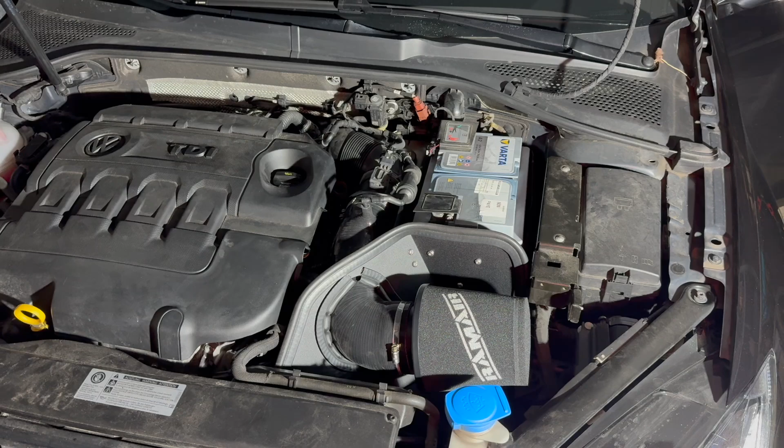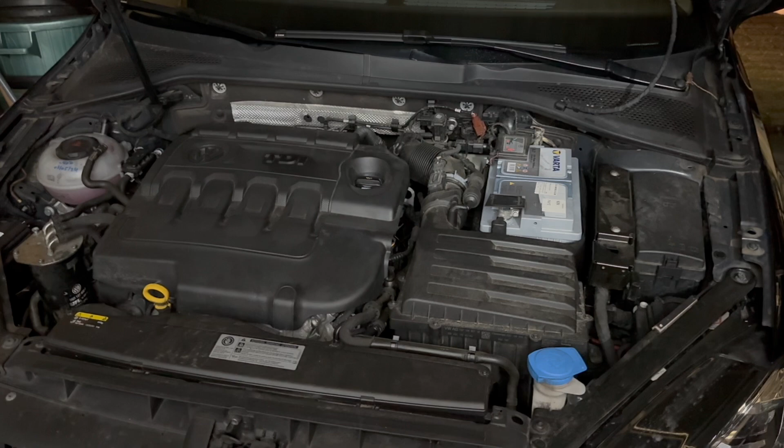Hi guys, today we're going to install the RamAir cold air intake into my Golf 7.5 1.6 liter TDI. So this is everything that came in the box as ordered online. All the tools are here, all the parts are here. You get yourself a neat little installation guide with this.

This is also what we're going to follow today, and what you will need for this installation, it's really pretty easy. It's just a screwdriver, an Allen key and a sharp knife. For the rest, you won't need anything else, just your hands, probably a friend to help you out, and we can go ahead with the installation.

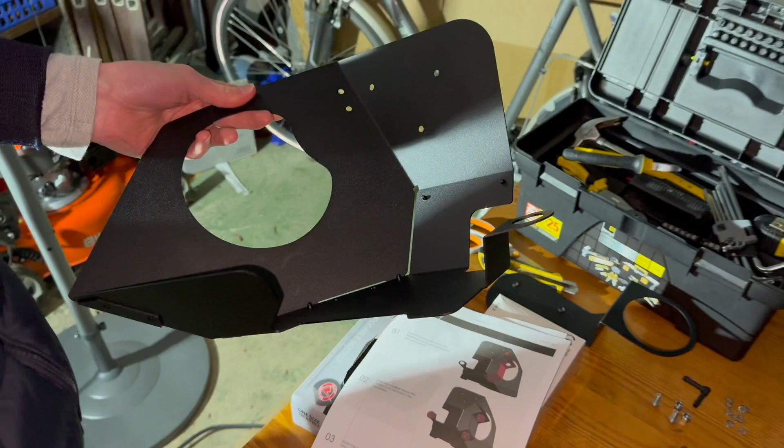So the first thing we're going to do is assemble the entire kit, and then we're going to install it within the engine bay. So the first step we have for the kit is to install the first bracket onto the heat shield. So you'll take your two pieces, you take your heat shield, and the first two bolts you will be looking for are underneath. You put the shield on it like this, and it will just be plug and play like Legos.

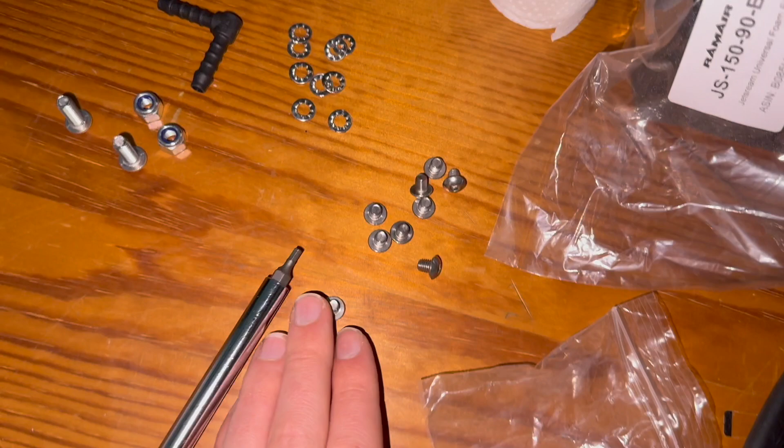The two holes up there will align the two holes underneath, and you need to bolt this with the small little screws supplied. So you have 9 small ones and 2 big ones. It's the small ones that you need to use. So we will need 4 bolts for this with 4 of these washers. We started with the first 2 bolts under here.

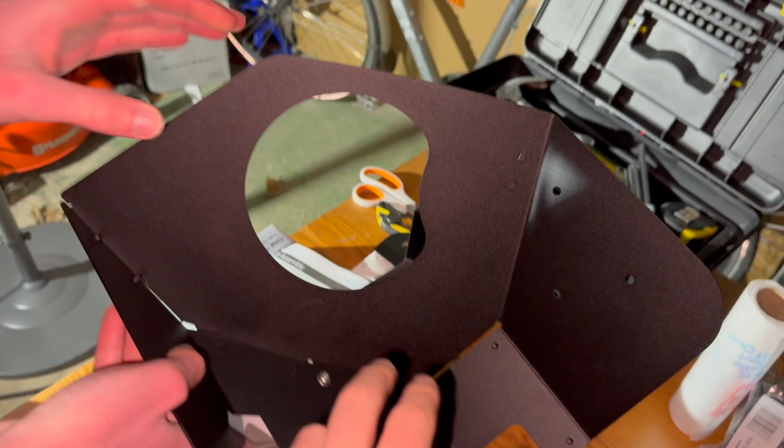So what you do is you take a washer, you then put your bolt inside of it, and it's bolted in from the inside. So the end of the bolt comes out here, and it's actually very flush and flat. So it makes kind of sense to do it like this. So we did the 2 first ones, and now we're going to do the 2 ones up here.

The second step in the kit assembly is to take these rubber feet. You have 3. I already installed 1, and you need to put them into the 3 assigned holes. 1, 2, 3. You can't miss them. There's 1 right here, and then 2 in the bracket you just installed.

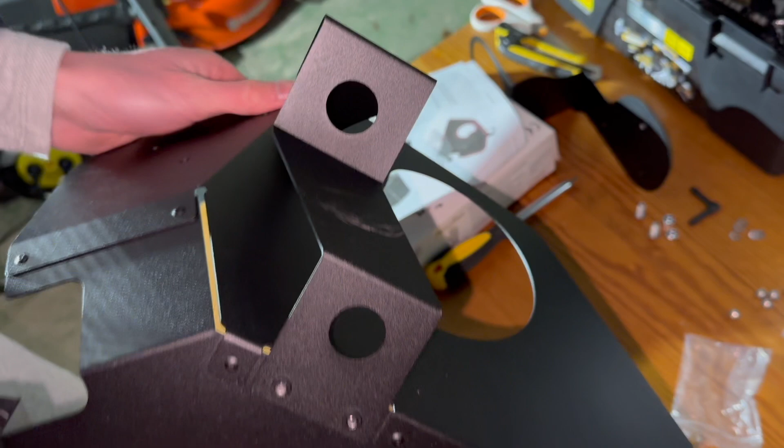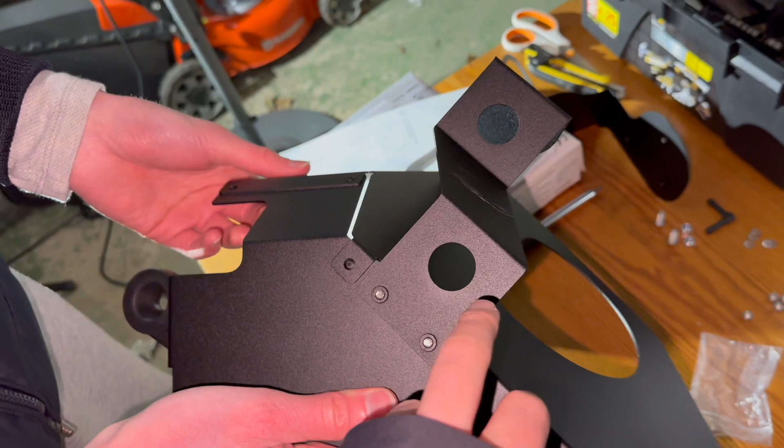I just did 1. Let me tell you, you need to apply a lot of force. It's kind of cold right now, so metal maybe is a bit more tight in these temperatures, but really you need to apply a lot of force, but be aware to not fold your metal by applying too much pressure. So just take these, put them in like this, and push hard to get them in.

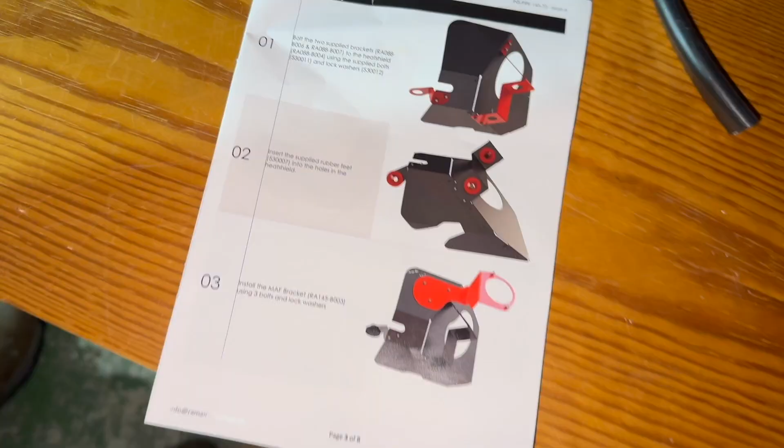The next step we have is installing the second bracket that was delivered also onto the heat shield. So you just take it, there's no way of doing this wrong. You align the holes down here, you put it like this, and again you use the same bolts as before. We use 3 of these with 3 washers, and we bolt from the inside.

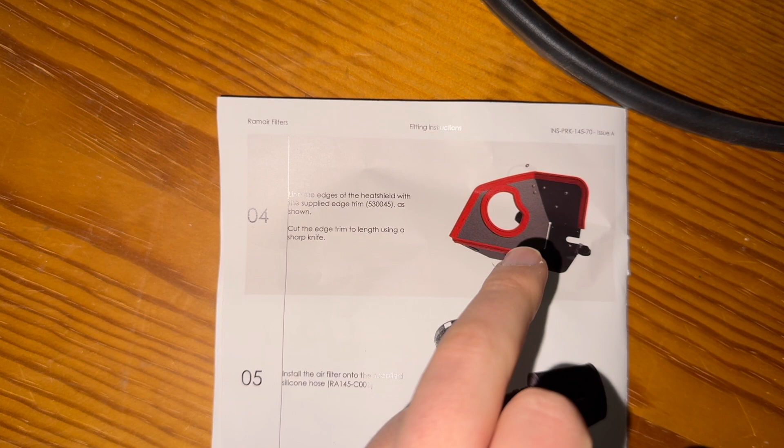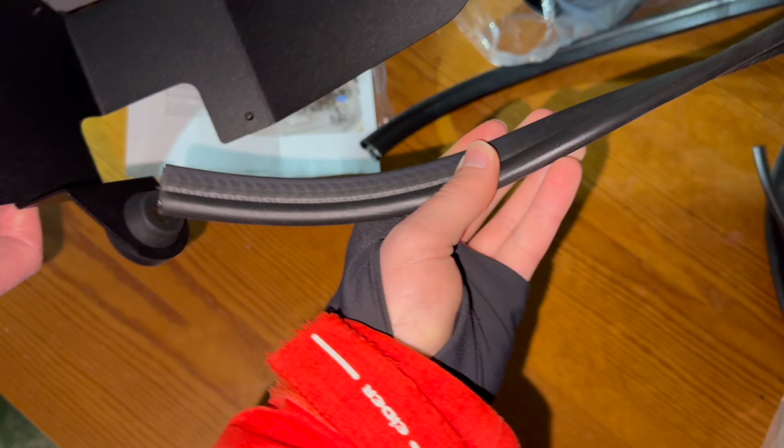Now that we bolted them from the inside, again with the washer and the bolts flush on the other side, we can go ahead with the next step, which is installing the edge trim that we have right here as shown here. So this is what we're going to do right now. So it's pretty straightforward, as it just has an edge where it needs to go into, and what's left over should be cut. So we have also prepared a small cutting knife to do this.

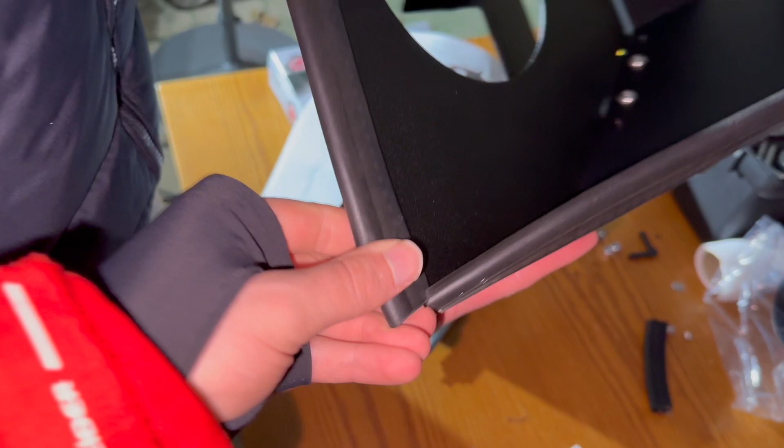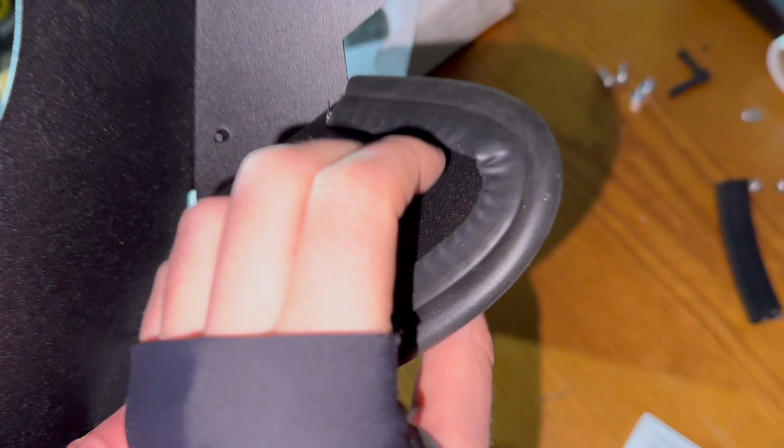So we have installed the first part, and we have some leftovers. So right now we'll just pull it out and, like right here, cut it just with scissors. We had cut off at this corner, and we installed the next piece going from here. And on the image we can see that it goes into this corner. So we did this. It's kind of crooked. You can see that it bulges on both sides.

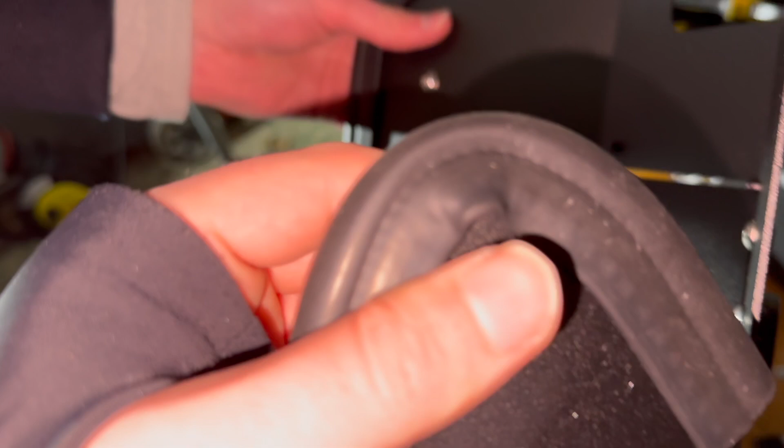But when you cut here and you push really down, it seems to stay in place. So we'll leave it like this right now. We can feel metal pieces inside that are now bent and don't move anymore. So we'll proceed now with installing the final part, which is within here.

Here you go, we installed the final part. We cut it maybe slightly too short at the end, but that will be fine. And the key is really to put your hand like this and really push it down like that, and it will create bulges by itself. And there you go, all the seals, edge trims are now installed.

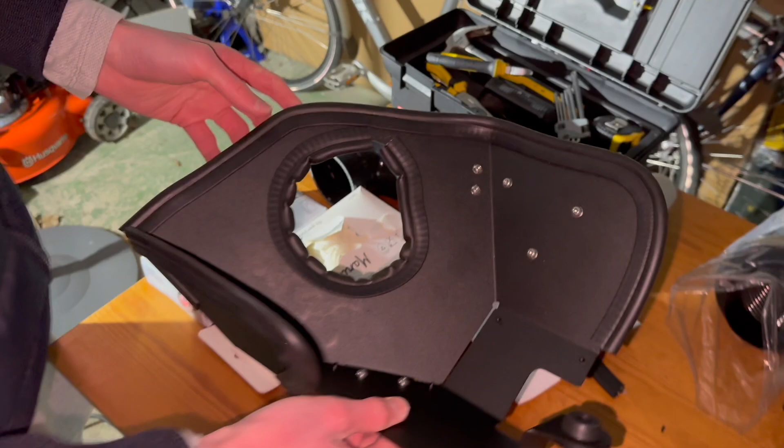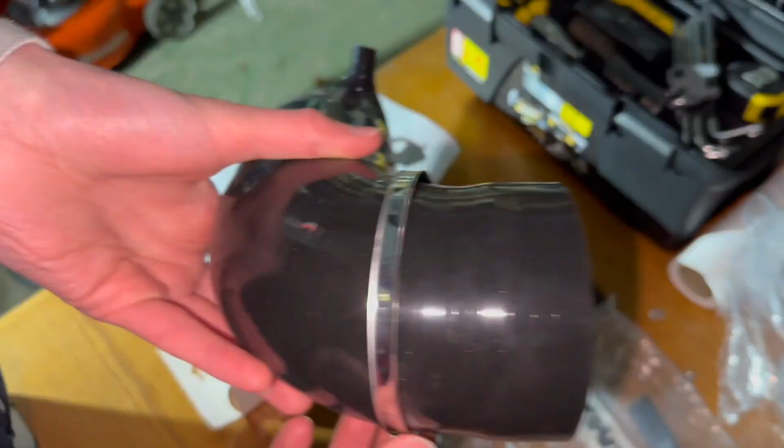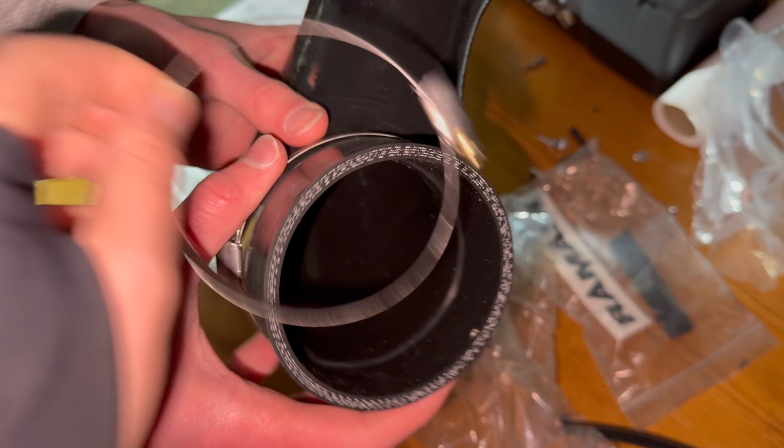We are now at the last step of the preparation of the kit, which is to take your cone and your hose and to put both together. But you will need for this extra, I don't know how it's called, ply or something to tighten it. There's only 1 of the 3 that are supplied that fit onto it, because if we try another one, it doesn't go onto it. And we checked, it's written on it that these are different sizes. Here you have 80-100. Here you have 70-100, so you can only take 1.

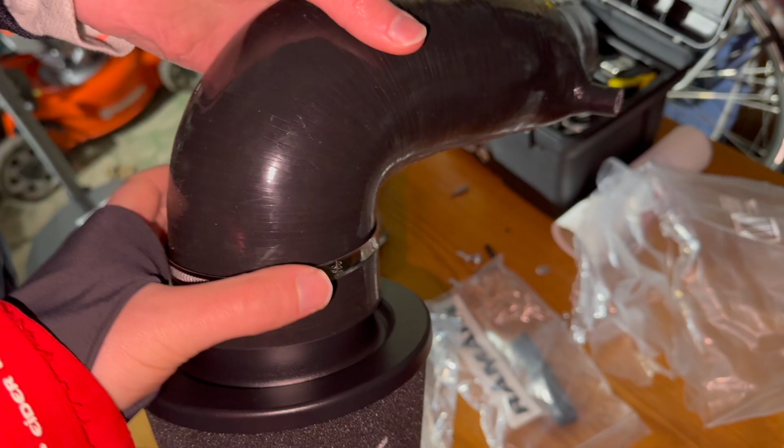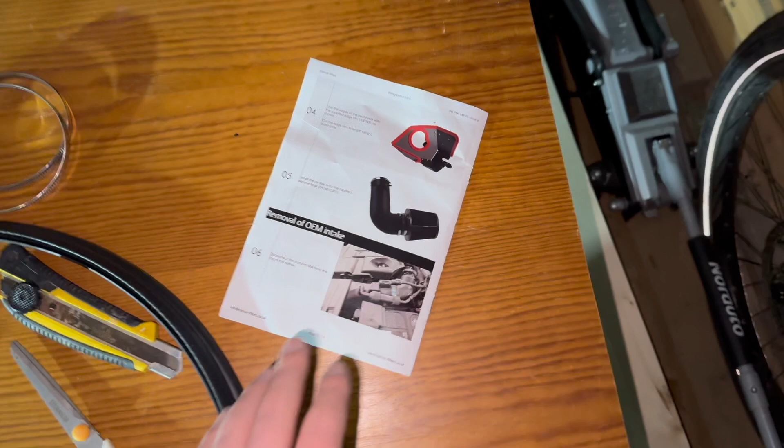So you take your cone, then you slide it inside. Normally it will stop by itself as there is a small edge inside. And then you take this and you tighten it. We have now installed the cone onto the hose. We have also really tightened the only bracket we were able to use. And for now, the kit is then officially assembled. So we'll go over to the removal of the OEM intake.

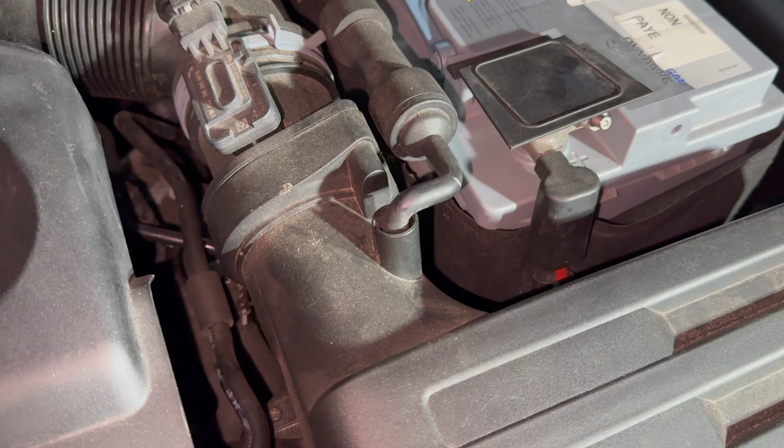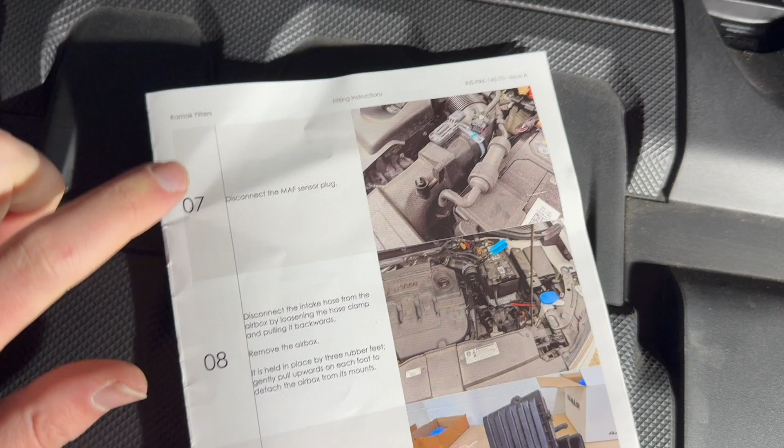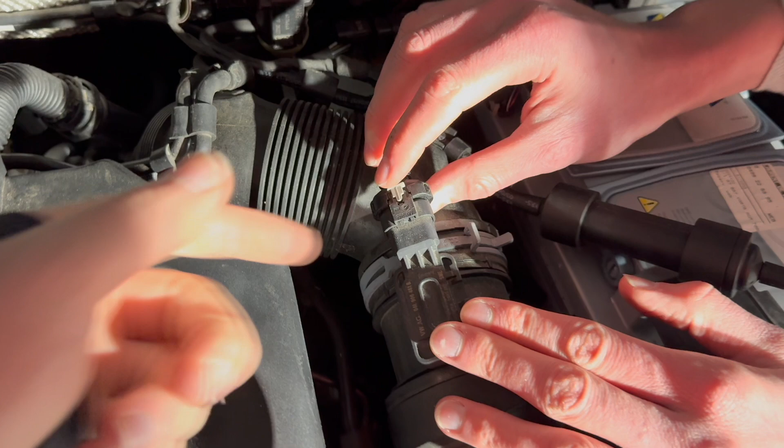The first step we have in the removal of the OEM intake is to remove the vacuum line from the top of the airbox. It's situated right here, and what you need to do is pull on it to remove it. The next step is to remove the MAF sensor plug, which is located right here. So first of all, you will need to pull back that little gray pin like this. And then you have a pin up on it. You need to press down on it to then securely remove the plug.

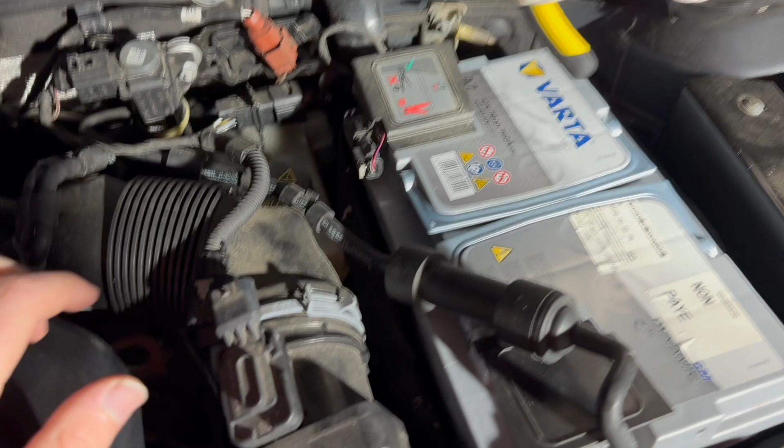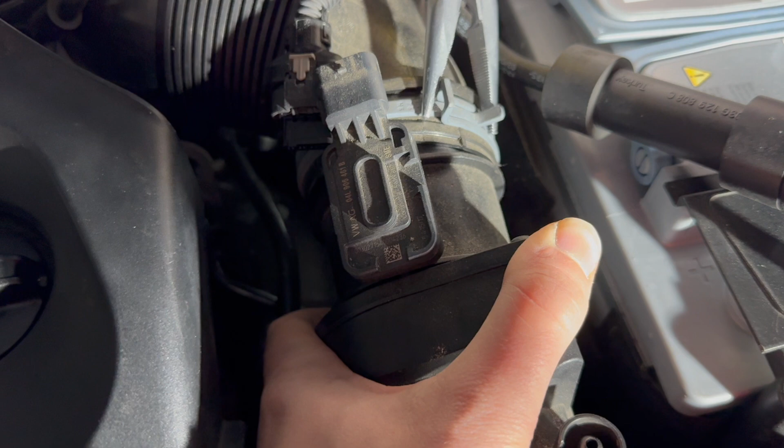The next step now is to remove the intake hose from the airbox. What you'll need for this are tweezers, and you have this clamp right here that you will need to clamp and really push on it to untighten it. This is really difficult to do alone. I would recommend to do it with two people, one unclamping and the other one pulling on the hose to remove one from the other. So we won't be able to record this right now, so we'll record again once we're done with this step. We've just finished with untightening this, and really you just push with your hand until it comes off, and then we're done with this step.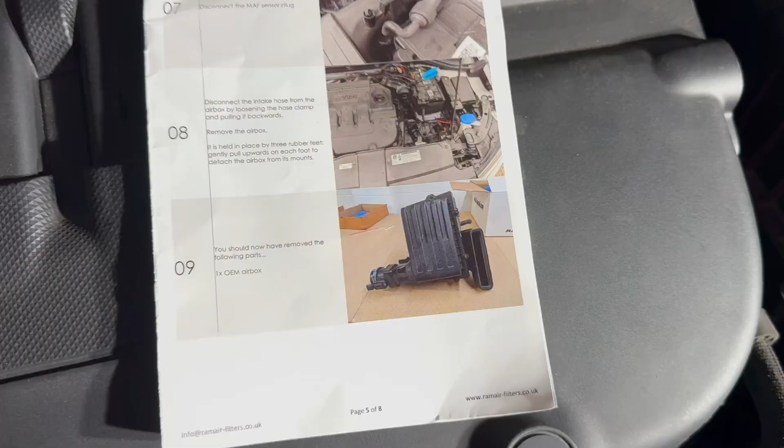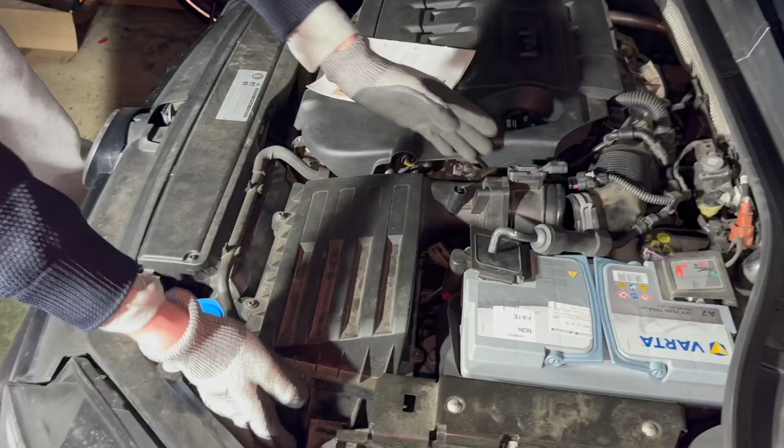And then the final step to remove the airbox right now is normally to really just take it out. It's held by some small rubber feet like the ones we installed before onto the new kit, so it should be pretty straightforward. I'm quickly jumping from the editing booth just to tell you while you're looking at it that it's a bit sketchy to pull on it, but these are just rubber feet. There's not a lot that can go wrong with it, so you really need to just yank on it from several sides until one of the rubber feet comes loose, and you will see in the next clip what I mean with this.

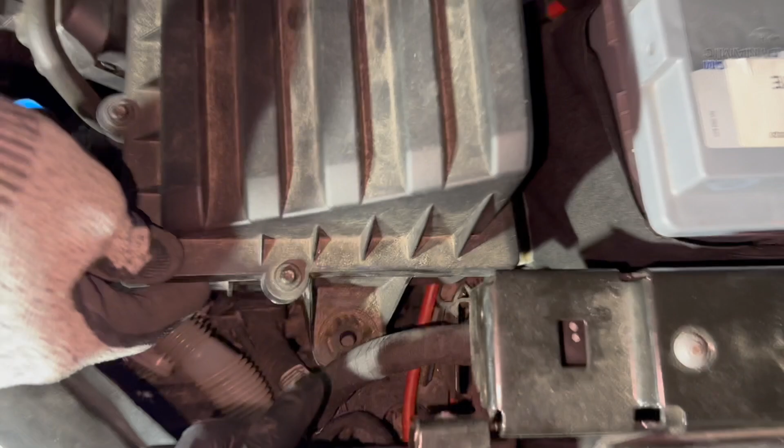To remove the airbox, you already were able to remove two, so you have three rubber feet. You have one right here, you have one down there, and one underneath that you can't see. So we just did two of them, and for the last one, yeah, you just need to pull, start it from the back, and it will remove.

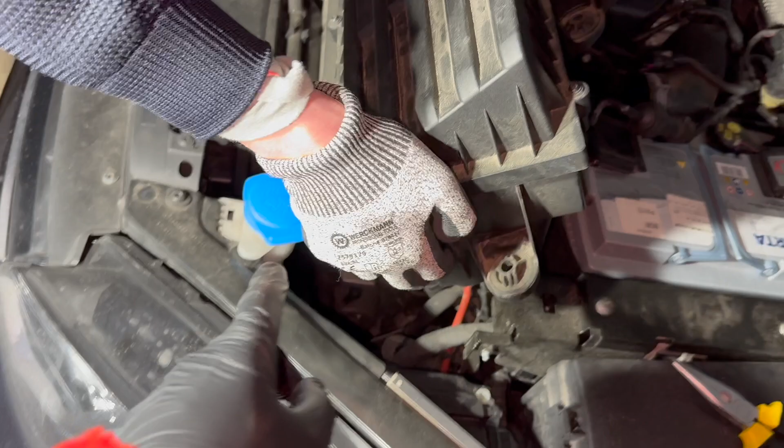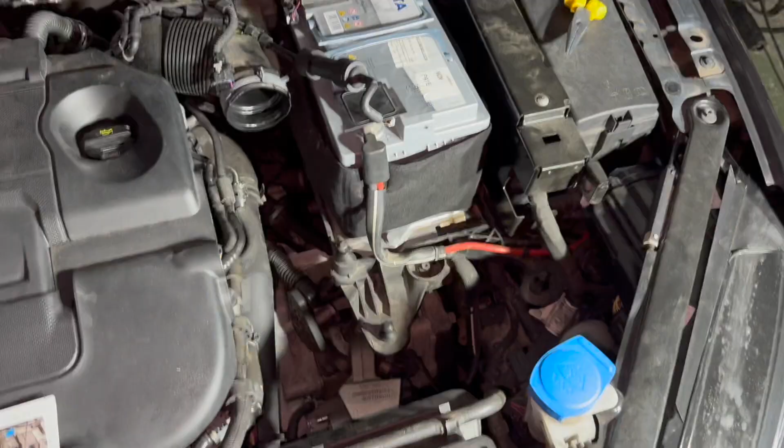And there you go. You need to watch out with the final part, as this is connected, as you can see, to the air intake, but it is all fine. And here you can see, here's a rubber foot, here's a rubber foot, and here's the rubber foot. We have now successfully removed the airbox from the engine bay.

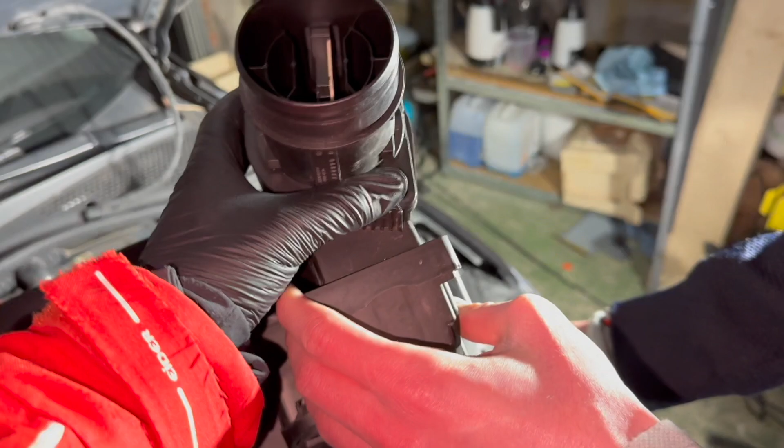The next step we have is to remove the MAF sensor housing from the airbox. So it is right now on here, and it is held in place by two bolts right here. So these are torx bolts that we need to remove to take off this part.

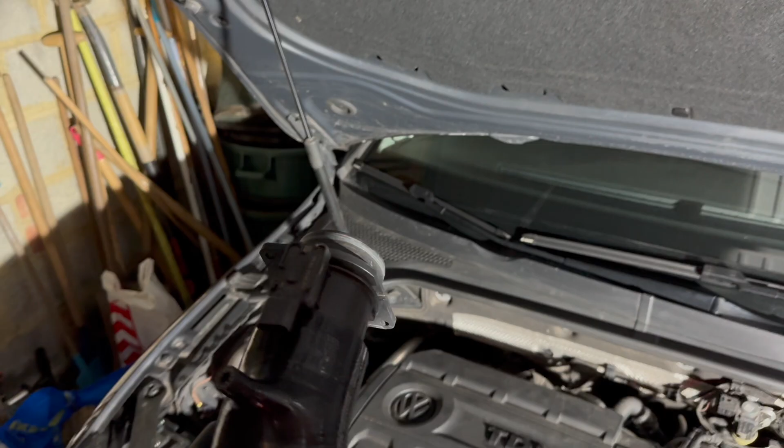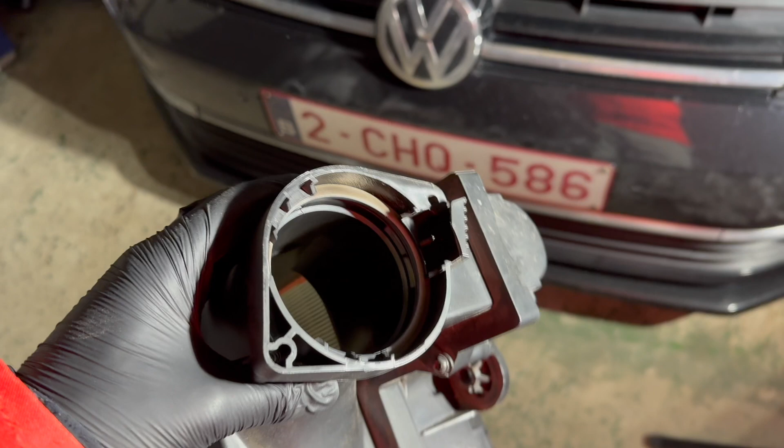So we were able to remove the MAF sensor. There was only one bolt, sorry for my mistake, and then it's held by this kind of ridge. So what you need to do is turn anti-clockwise to remove the MAF sensor, and it will come right off if you removed the first torx bolt.

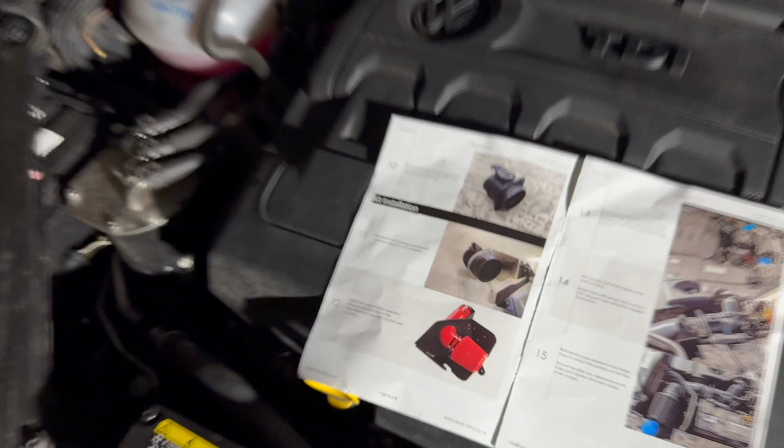We are now going to the kit installation, and the first step is to take the sensor we just removed and insert it into the bracket of our heat shield, and then bolt it. The issue we have is that it's physically impossible to bolt, as the holes do not align, and there are not even holes in our brackets.

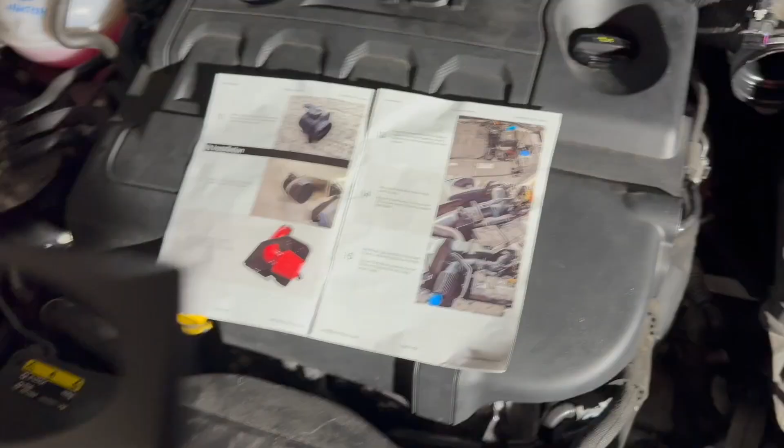There are none. So we're going to try this another way, and we think that we need to clamp it down later on. We'll just skip this step for now and go into inserting the hose and the filter through the large hole from the heat shield.

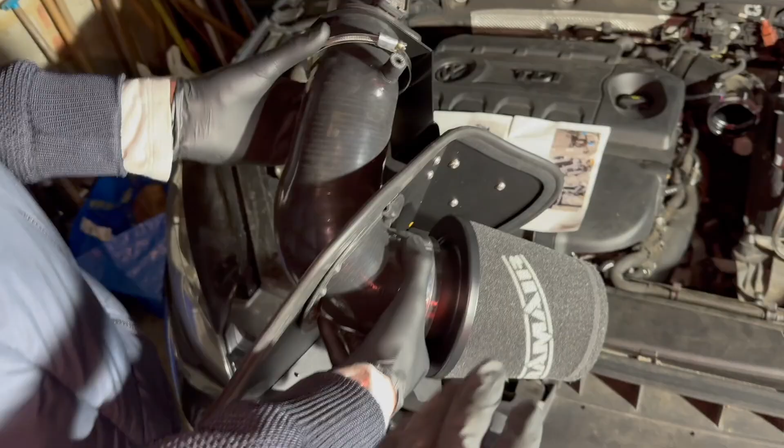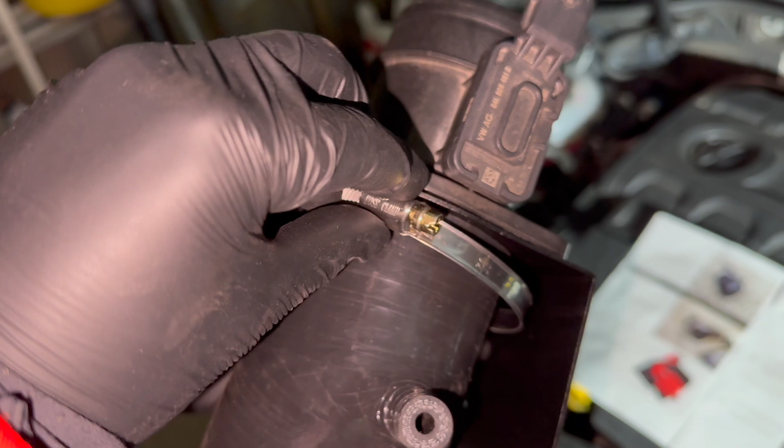We took our hose with the cone and put it inside the big hole. We have the MAF sensor that we slide through from the other side, and we put this tube over it. And now all we need to do is clamp it down, and this is why we think that we won't need the bolts as told before.

We decided in the end to do two clamps because we had one left over. This is not an obligation, as we see on the pictures, there's only one, but we don't know what to do with the one that remained, so we'll just put two for security. We have now successfully mounted the two clamps.

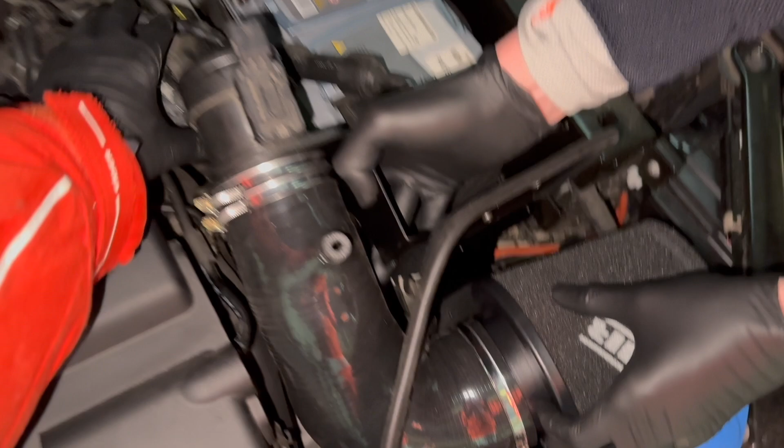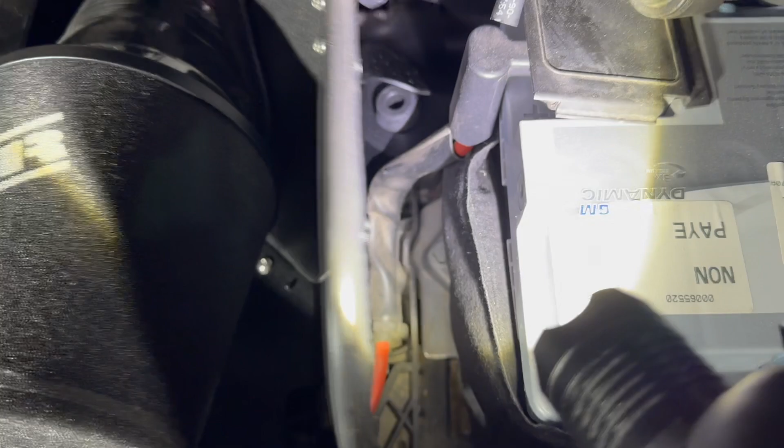The next step, step 13, is putting the airbox into the engine bay and pushing it down onto the rubber feet like we did with the old airbox. So this is what we're going to do now. We were now able to push gently onto the first one. There are two more rubber feet down here that we just need to push down. And it is now securely in place.

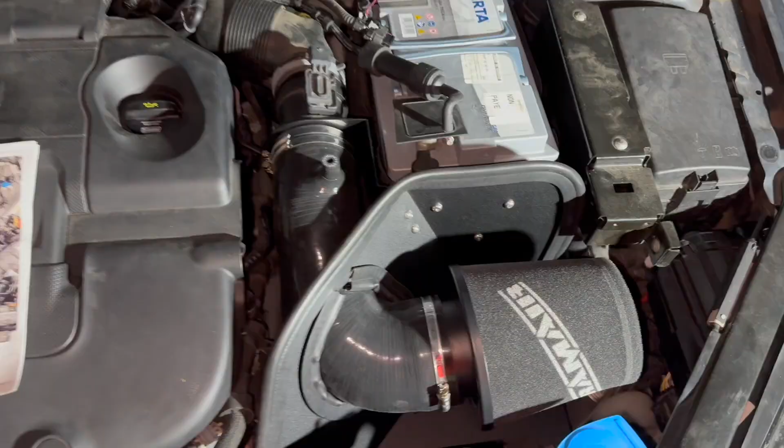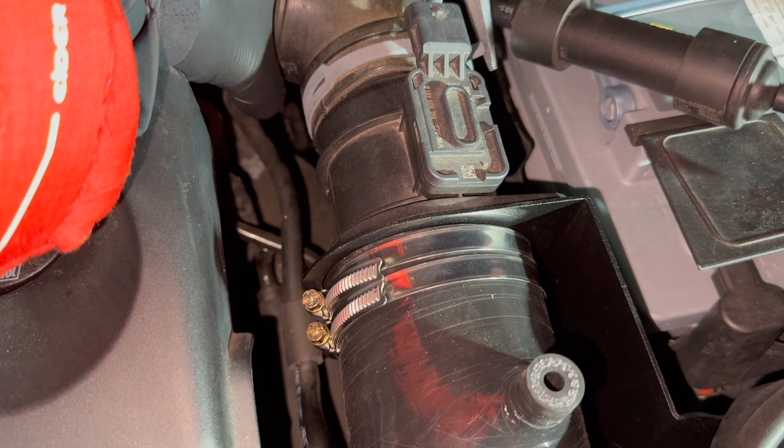So now that the new kit is on, you can already align the back hose with the MAF sensor, and what you need to do is again clamp it down, push it in, and then it's reconnected. We have now reconnected the MAF sensor with the rest. So the next step is to replug your sensor like this and put back the little pin.

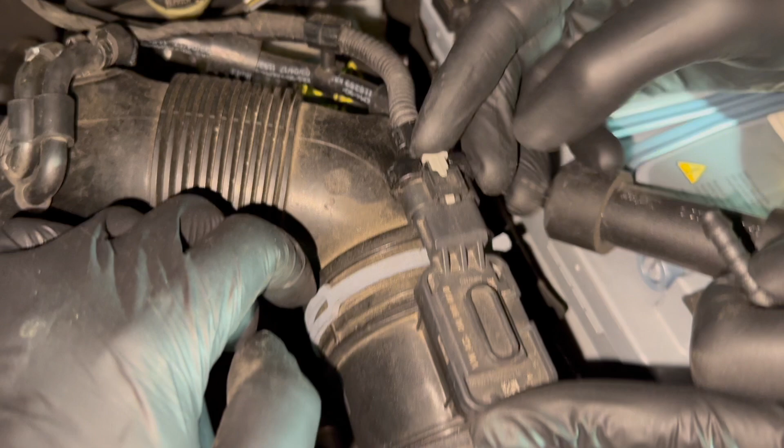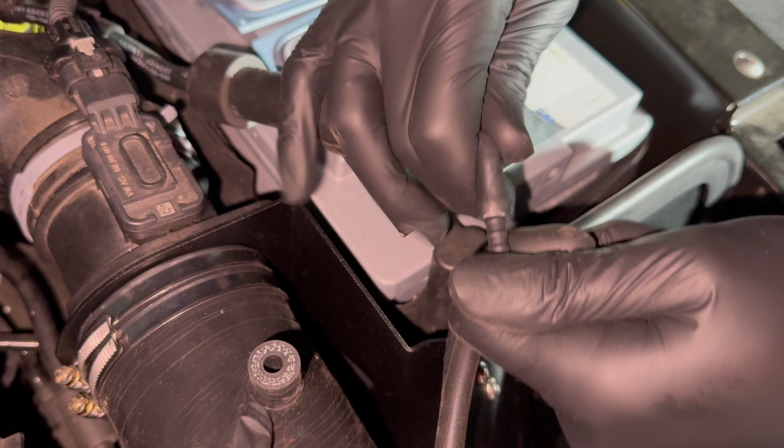And then the last step is to put on the vacuum hose that's delivered with the kit. You can put it first onto your tube, really snug and fit. Really push it down. And then the last step is to put it inside of your kit. Really push it down snug. And there you go, installed.

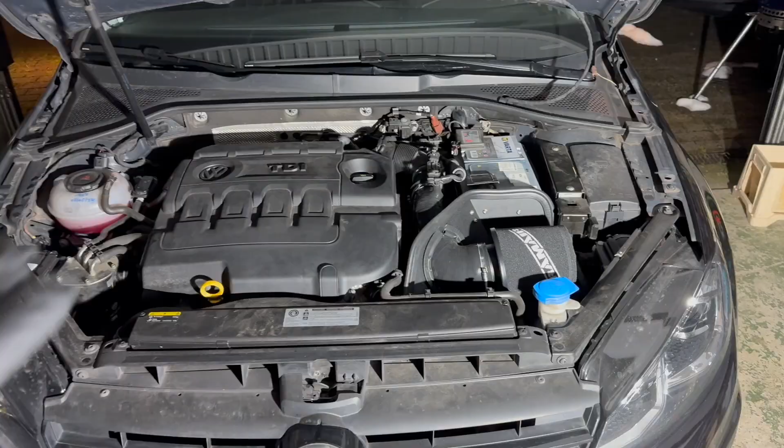The installation is now complete. Everything should be installed correctly. And you can now enjoy your new Ramair filter. I will now play a video of the sound of this new filter.

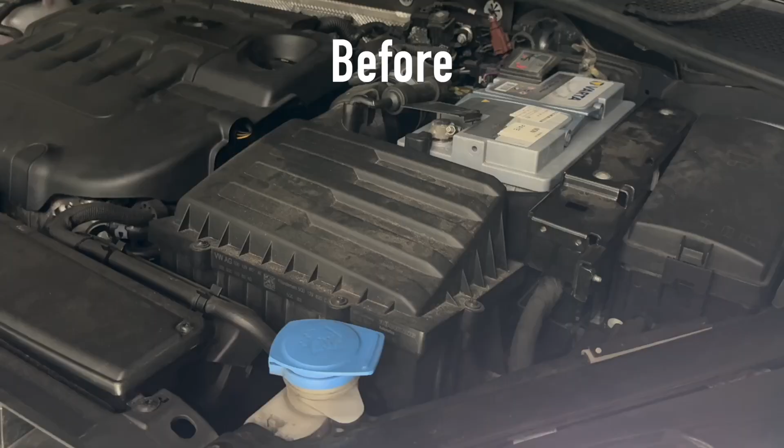One more benefit I forgot to mention of installing this cold air intake is that you will hear the turbo flutter through your cold air intake. I have assembled a few clips of this happening for you to take a look at and hear this turbo flutter that you will hear from inside your car.